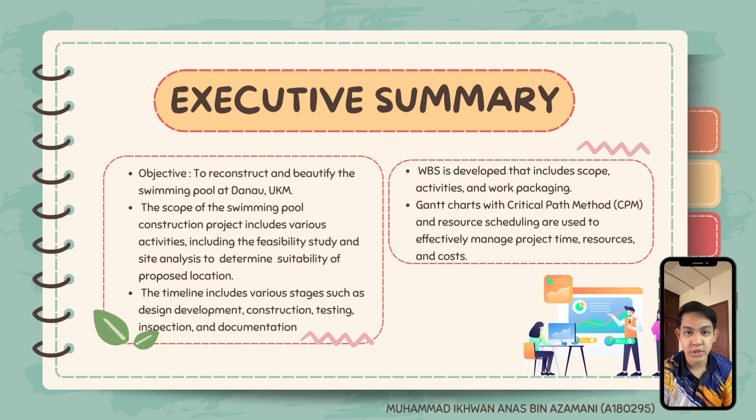Today I would like to explain about the executive summary for the WATAN Pool project. The first objective is to construct, reconstruct and beautify the swimming pool at Danau UKM. The scope of the pool construction project includes various activities including the feasibility study and site analysis to determine suitability of the proposed location, and the timeline includes various stages.

Title of the proposal: to reconstruct and beautify the swimming pool at Danau UKM. Objective of the proposal: to attract more students to come and learn swimming at UKM, and to generate more income for the university. The aim of the proposal is due to the lack of facilities such as diving boards and others.

The location of the project is at the swimming pool Danau UKM. UKM always wants to keep their students healthy, so swimming is one of the best ways to maintain our health. The current Danau swimming pool is in need of major repair. It is also not well maintained, so our project is to rebuild a new pool.

For the organization, we have Muhammad Ikhwan Anas taking the lead as project manager, followed by Iziana Shuhada as marketing manager and Abdul Rawi as HR and communication manager. Two other managers are Muhammad Haikal as procurement manager and Nur Akila Shazrin as fundraising manager.

The mission of Project WATAN Pool is to gain attention and support. Facilities will be enough for all and guaranteed in their best condition. The vision of Project WATAN Pool is to enable a new hobby for students to unwind themselves during break time. We want to make swimming an affordable hobby again that saves money, and the distance is very near too.

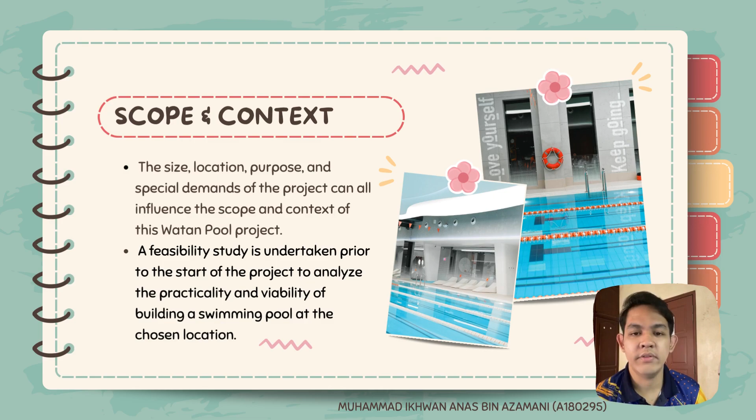For the scope and context, a feasibility study is undertaken to analyse the practicality and viability of building the swimming pool at the chosen location. We need to know 4 things, the first being design and planning, for which we need to collaborate a lot with the architect, civil engineer, contractor, and also the pool designer.

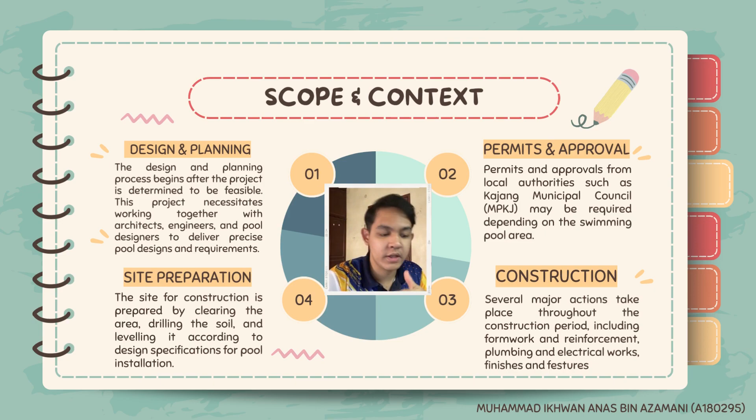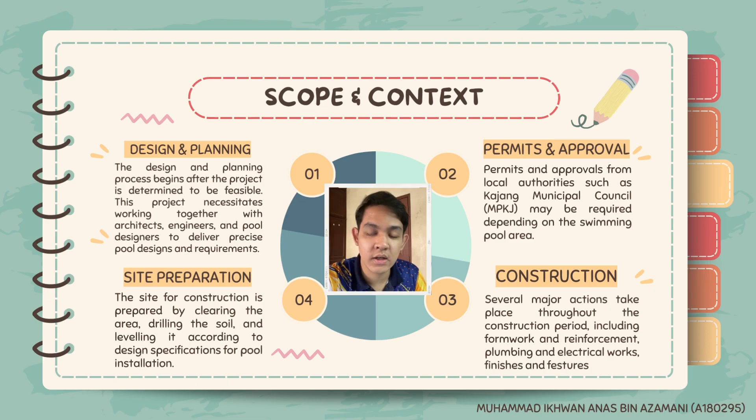Next is the permits and approval, where we need to get approval or permits from the local authorities, which in this case is MPKJ. For SWOT analysis, we analyze our strengths, weaknesses, opportunities, and threats for the project in order to maintain our project quality.

We also identify some issues that arise for this project, for example regulatory compliance, materials availability, and limitations in terms of financial and resource constraints, which may impact the project efficiency.

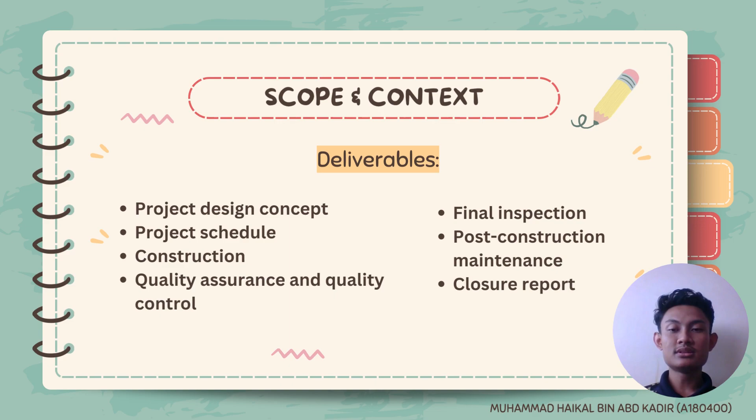The deliverables for this project are project design concept, project schedule, construction, quality assurance and quality control, final inspection, post-construction maintenance, and closure report. We have 3 characteristics for technical requirements: first, technical standard, second, technical issues, and third, technical component.

Limits and exclusions can be defined as the boundary of the project, stating what is not included and what is not covered over the life of the project and at the end of the project implementation. Our potential users are athletes, staff, students, and outsiders.

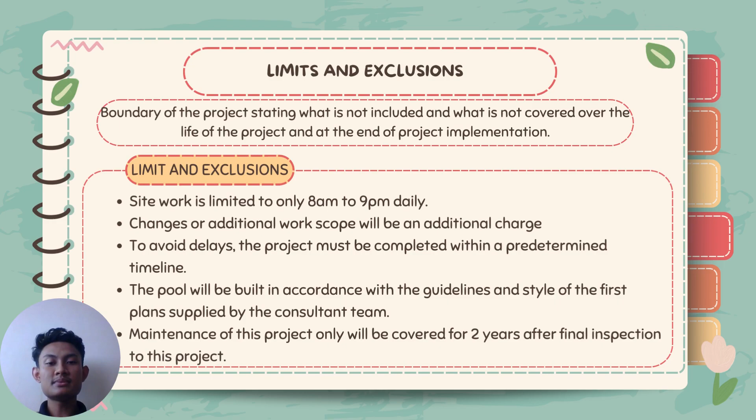This project solves the problem by reconstructing the pool with new attractive design, new devices, and Olympic standards. This project can potentially attract more users outside of UKM and reduce maintenance costs. Market need is targeted to any academic collaborator or student who wants to learn swimming professionally.

For market research, first we use open-ended questionnaires from the customer. Second, we get specific feedback from regular customers.

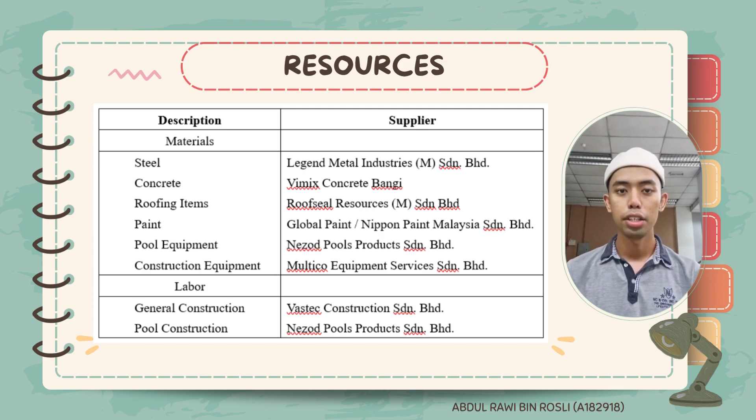Suppliers are selected with the best quality over value, and suppliers with the most expertise and experience are generally chosen. This project requires several construction professionals, such as project manager, engineers, and architects.

For the finance, there are 5 types of costs considered in this project: raw materials cost, labor cost, maintenance cost, utility cost, and transportation cost. The total cost estimation for this project is 312,078 ringgit and 75 cents.

Project WATAN Pool takes about 5 months to complete. The first month is where all drawings were finalized between the contractor and owner. We also waited for MPKJ's approval and permit to start.

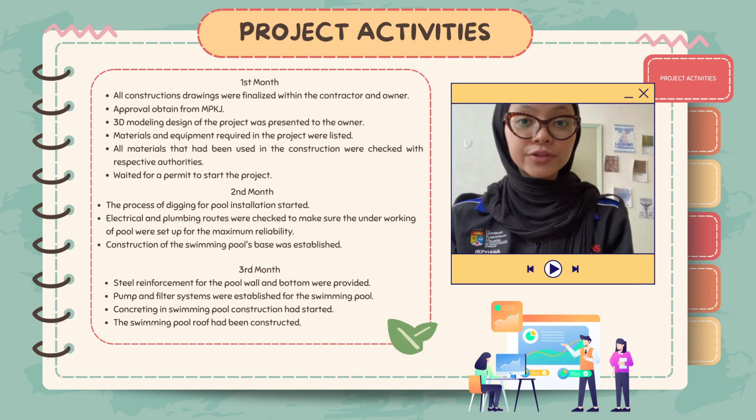The second month is where the process of digging the pool started and the base was established. By the third month, steel reinforcement for the pool was constructed and concreting started. By the fourth month, construction of facilities started, including landscaping. On the very last month was the finishing process, and the pool is now open to the public.

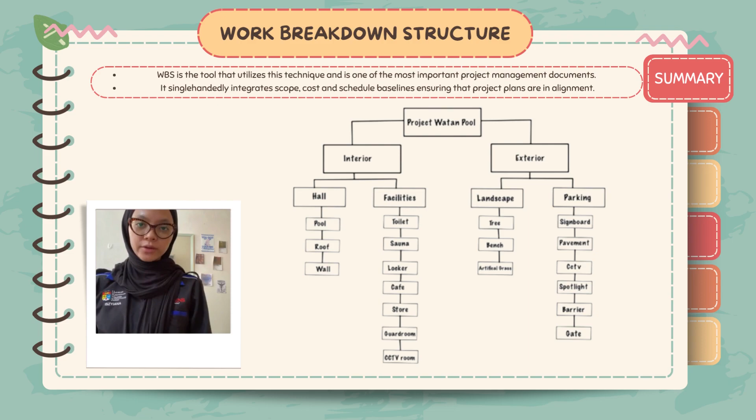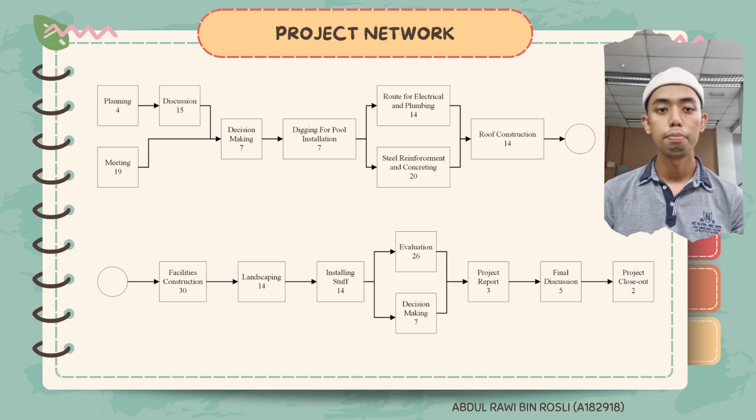I will not go through this one by one, but this is how our WBS looks like. The project generally starts with design, then construction, and lastly closure. During construction, trenching needs to be done first. Then structural and M&E activities can be done in parallel. Lastly is decorative work, such as landscaping.

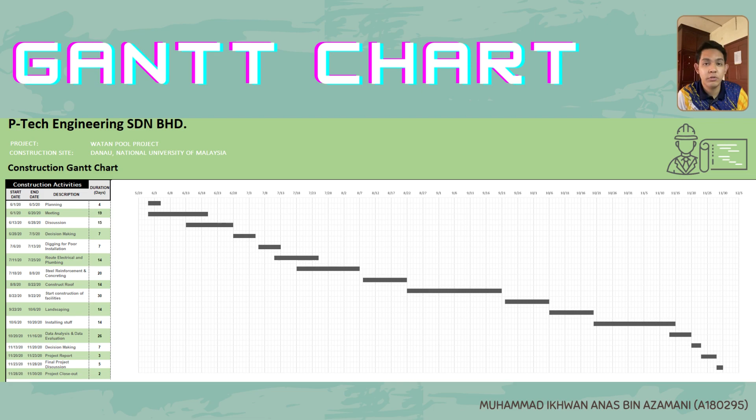Next I would like to explain the Gantt chart. We can see that the project begins on 1 June and ends on 30th of November. In the Gantt chart we can see the description, which explains the activities. We have the planning phase, the construction phase, and also the documentation phase. All the processes of the construction of this project are shown there.

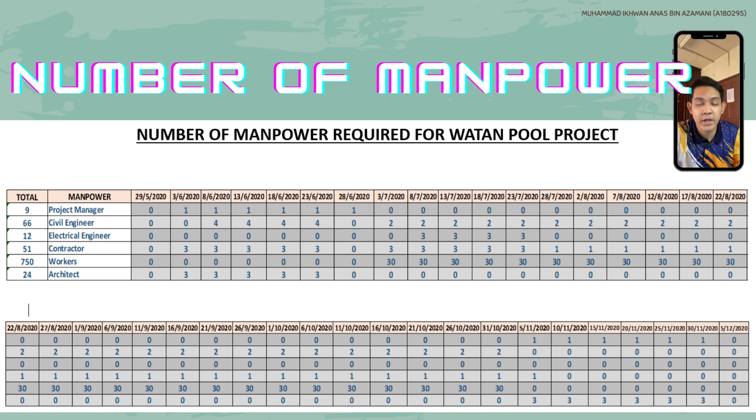Next is the table of manpower required for the WATAN project. In this table we can see how many manpower we need to prepare for the project, which includes project manager, civil engineer, electrical engineer, contractor workers, and the architect, who will contribute a lot to construction preparation and the construction work itself.

We have 5 risk identifications. First would be inadequate budget. Second, environmental factor, while the third is quality of performance. The last 2 are equipment malfunction and time management.

Next is the mitigation plan. We have 5 things we need to look at for this project. The first is poor time management, for which reports need to be submitted within due time. Next is equipment malfunction, where the equipment needs to be changed from a contractor. The next is environment and safety, where the condition in the storage area needs to be maintained.

Expected impacts and benefits for the economy: the construction process can create job opportunities and support the local construction industry. For health and wellness, swimming offers numerous physical and mental health benefits.

For safety, this helps prevent accidents and ensure the well-being of swimmers. For accessibility, it makes the swimming pool center more inclusive for people with disabilities.

In order to claim our copyright for our logo, branding related to the project, pictures and prototypes, we need to apply with the Intellectual Property Corporation of Malaysia.

To achieve our goals and aims for this project, we need to get the permits and license from local authorities, follow standard specifications about construction and engineering, apply a safe working plan, and conduct surveys to get customer review and satisfaction about our project.